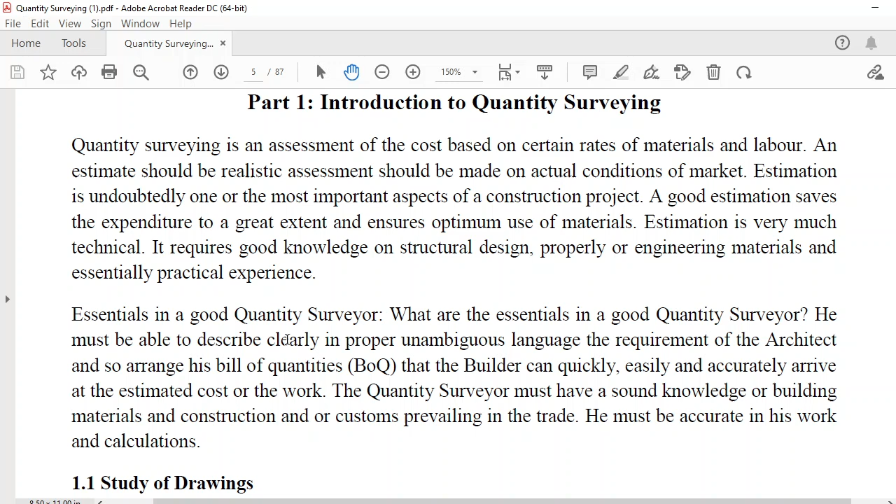Tapos, di ba, I asked you to at least be able to start working on your structural drawing. So bali today, we will discuss about the next book, which is Quantity Surveying. Pa rin ang title, pero medyo may iba siyang scope. So we have already considered na, or you are aware na what is a quantity surveyor.

So, he must be able to describe clearly in proper unambiguous language the requirement of the architect and or civil engineer, and so arrange his bill of materials or bill of quantities that the builder can quickly and easily and accurately arrive at the estimated cost of the project.

Okay, so bali sinimulan nyo na yesterday. I hope you did that, to study the drawings kasi yun yung i-estimate nyo later. So when working on your drawings, you have to look on the drawings and attempt to visualize the work entailed. So study them and are in agreement with one another.

You check on the drawings, the elevations, which are actually given na ngayon dun sa attached drawing kahapon pa. Okay? So actually, we will end up with a bill of quantity of the materials.

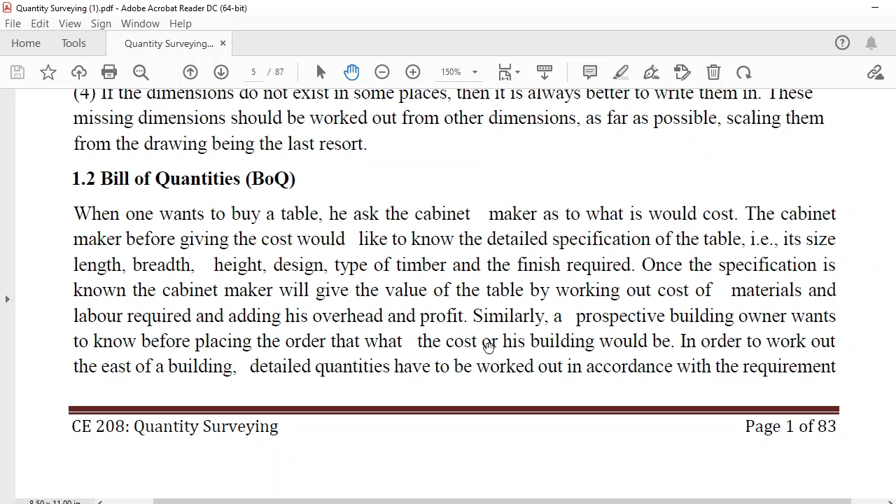Its size, its length, diba? The breadth, the height, the timber, and the finish required. Painted ba or may varnish? Now, once the specification is known, the cabinet maker will give the value of the table by working out the cost of materials and labor required.

Now, in addition to that, syempre, imposibleng wala siyang profit at saka meron din siyang overhead. Overhead may probably be for the equipment he uses, fuel kung kailangan niya, electrical consumption, water consumption if needed to finish the work. Now, similarly, the prospective building owner wants to know before placing the order that what the cost of his building would be.

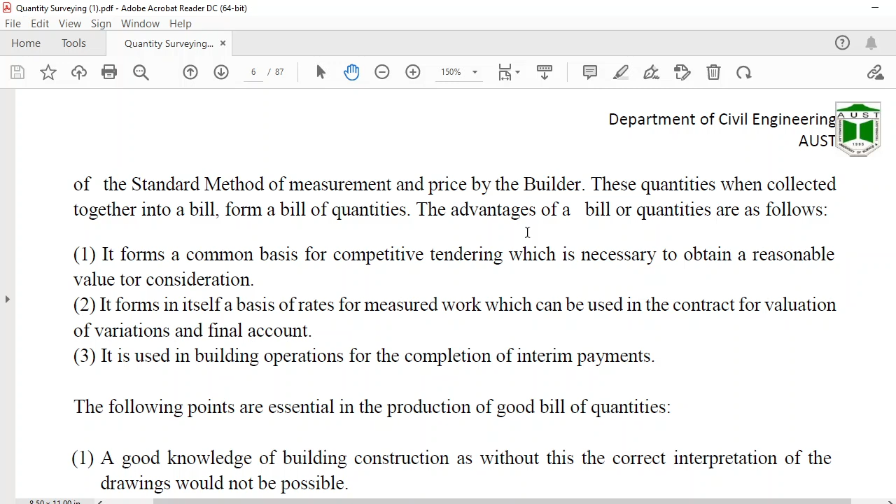So ganun yung concern natin. So in order to work out the cost of the building, a detailed quantity should be prepared for the client. Now, the standard method of measurement and price of the builder should be given. The quantities will be collected together into a bill. So after you have determined kasi yung mga quantities, syempre, ang kasunod na nun, yung mga pricing.

Now, for our subject, we will be focused on the quantities and how will you determine the bali measurement of your structural members and the materials to be used. Now, the bill of quantity, advantage of that is it forms a common basis for competitive tendering.

When we say tendering, ito yung naririnig natin na bidding. Wherein, syempre, paglalabanan if you will be the contractor for a certain structure. Now, it forms in itself a basis of rates for measured work which can be used in the contract for valuation of variation and final account. Now, it is also used in building operations after the completion of other payments or interim payments.

Now, the following points are essential in the production of a good bill of quantity. So ito, kailangan ganito. Now, a good knowledge of the building construction. So mas madaling ika nga, at least you know how to construct actually the building. Yung method use, di ba? Para maging katapat niya yung mga labor cost niya at saka yung equipment that you will be needing.

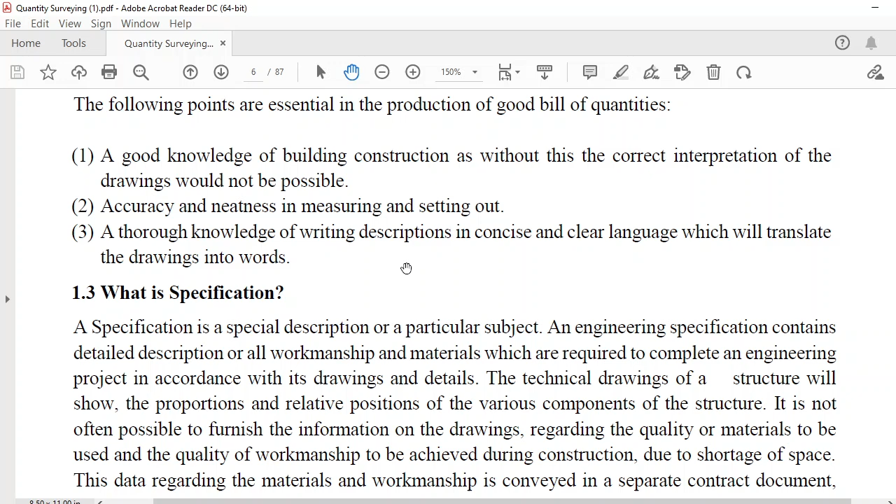Tayo kasi, ang ginagamit natin is the drawing itself. Yun ang ating language. So hindi tayo basta mag-i-English dyan. Pero basta meron tayong drawings, nagkakaintindihan tayo dapat para makagawa tayo ng ending na bill of quantities.

Now, what is a specification? So it is the description of a special description or a particular subject. Now, in engineering specification, it contains the detailed description of all workmanship and materials which are required to complete an engineering project. So nandun lahat, naka-specify yung gagamitin mong concrete.

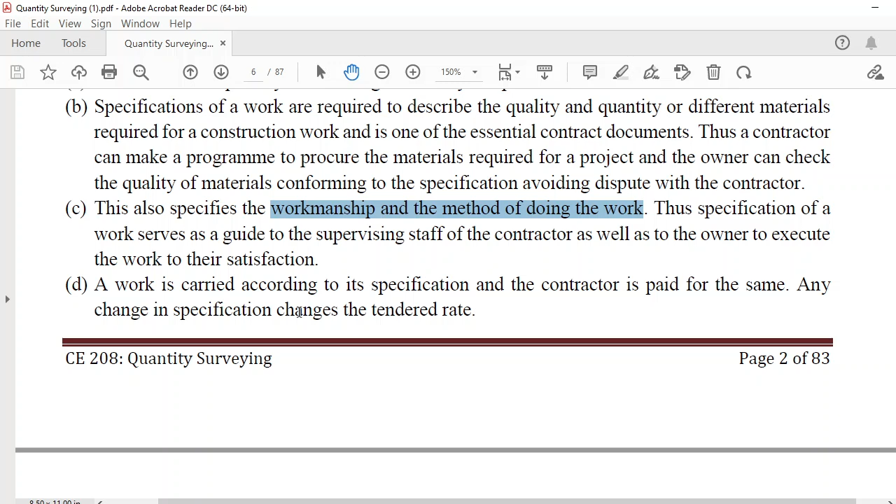Now, the work is carried out according to its specification and the contractor is paid the same. So this will really be discussed - what is the requirement for the work to be done?

As the rate of work is based on specification, a contractor can calculate the rates of various items of work in a tender, in a bid, or in a completed computation with his procurement rates and materials and labor. So that depends too on your labor - it can be higher for you if you have specialization.

Specification is also necessary to specify the equipment, the tools, and plants to be engaged for a work, and thus enables procurement of them beforehand.

The necessity of specification is to verify and check the strength of materials for a work involved in a project. For example, with steel bars, there are different strengths. But which will you use - high strength, medium strength, or ordinary? So definitely, the price will differ.

Now, the main items of works in a building are the following. You have earthworks - excavating the earth so that you can install your footings. Then concrete in foundation - in foundation, this refers to your footing, and it is specified in the plans I shared with you. It consists of lime concrete or lean mix cement concrete with the proportion depending on what is given.

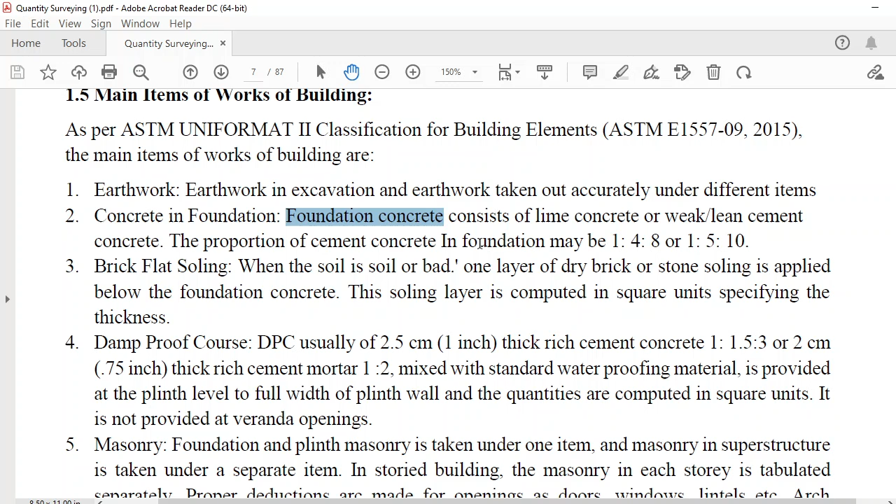We have brick flat soling - when the soil is bad, one layer of dry brick or stone soling is applied below the foundation. Sometimes they install piles, like posts, submerged into the soil to make it stable. Another consideration is injecting cement mixture into the soil so that all its voids or hollow parts are filled with concrete or cement, which increases the strength of the soil.

Then we have the damp-proof course, usually 2.5 cm thick rich cement concrete with the following specifications, depending on the requirement.

Now, masonry - when we say masonry, this refers to hollow blocks. So after the concrete mixture, next comes the concrete hollow blocks, or CHB as we call them.

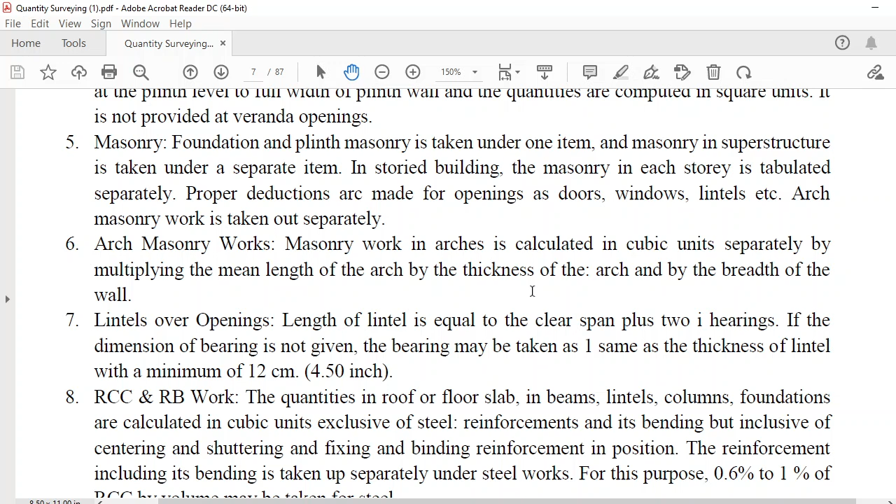So that's why it's very important that you know the structure itself, the shape, the thickness, and the overall dimensions should be specified and should be seen in the plans.

Lintels over openings, length of lintel. When we say lintel, this is the additional structure placed, like a small beam, on top of the windows and doors, so that your wall won't crush when you have an opening for windows.

Okay, then we have the quantities in roof or floor slab. So with that, you need beams, lintels, columns, foundation, etc.

Now, the reinforcement, including the bending of your bars, is taken up separately under steelworks. For this purpose, 0.6% to 1% of RCC by volume may be taken for steel. So if you have a concrete volume, you can deduct 0.6% to 1%.

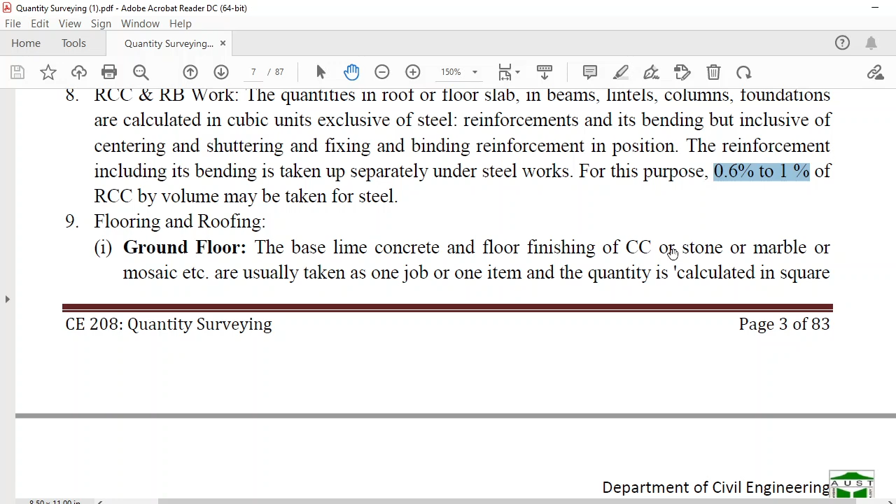And then for flooring and roof, the ground floor consists of base lime concrete, flooring finishing, and CC. It can have stone, marble, mosaic, those are the tiles, etc. Then for your first and second floor, there are supporting structures which are separate, so that will appear in the plans.

Now, our CHB, our walls, usually need plastering so that our CHB or hollow blocks become smooth.

Now, sometimes our small openings take up approximately 0.5 square meter, there will be no deduction made. But if it exceeds that, there may be deduction made for one face only, and the other face is allowed for jamb, soffits, and sills, which are not taken into account separately. For openings which are above 3 square meters, deduction is made on both faces of the opening.

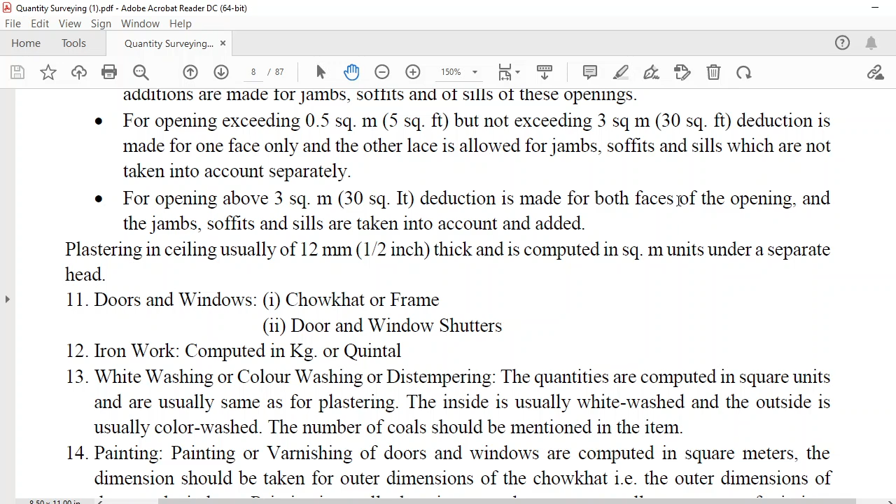As we go along with actual construction, and as you practice, you'll discover the needs for that. So for doors and windows, we actually have the frame, the door and window shutters, and then ironworks, which are usually computed in kilograms.

Quintal is not used much anymore. Kilogram is used when buying, but sometimes we do it by counting method, counting how many pieces you order with a certain diameter.

Whitewashing or color washing and distempering, the quantities are computed in square units and are usually the same as for plastering. The inside is usually whitewash and the outside is color wash. The number of coats should be mentioned in the item.

Now, for painting - to make your structure nice, you may place painting or varnishing, specifically for doors and windows, which are usually computed in square meters. And to be sure that your painting looks good, it is done in 2 to 3 coats aside from the preparation, so you don't simply apply the paint immediately.

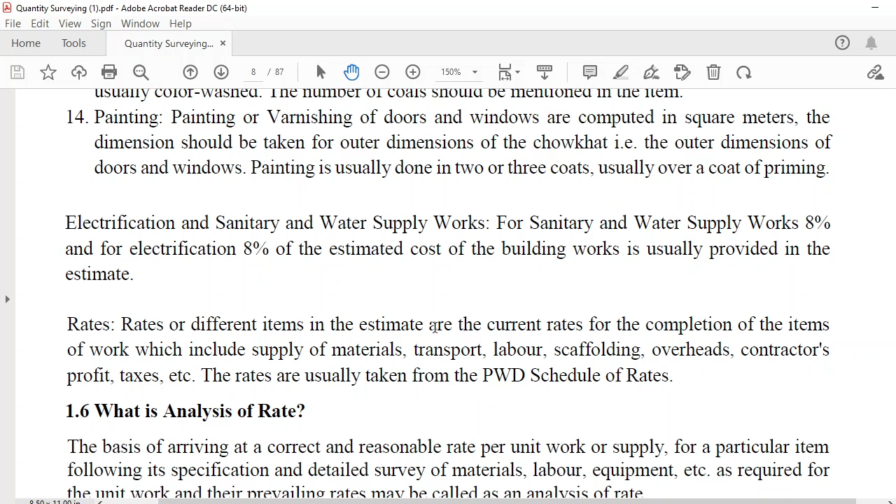So there are particular items that will not be estimated in this subject, like for example painting - we will focus on the others. Painting will be covered in your next subject, construction methods and management, next trimester.

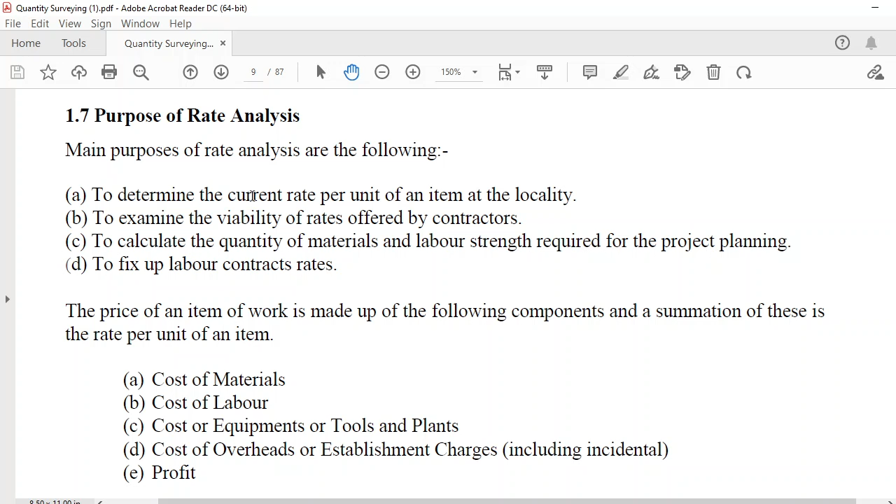Now, what is the purpose of your rate analysis? So we probably know that when you're in the city, the rate of labor is higher compared to rural areas.

Now, the price of an item of work is made up of the following: the materials, the labor, the equipment you will need, together with the tools and plants. Cost of plants - not the plants that are not plants, the area where you will work.

Or we could say the area you will rent so that you will install or house your materials. For example, those who build roads need a plant, they need an area. Instead of starting from their warehouse, they will look for an area wherein they will place the volume of gravel, sand, and cement. That's also where they will mix the concrete.

Parang ganon. So that's near the area to be constructed.

Now, cost of overheads or establishment charges, including incidental charges. As mentioned, when you have electrical, rental, water consumption, security guard, etc. And of course, you wouldn't construct without profit. That's important, of course.

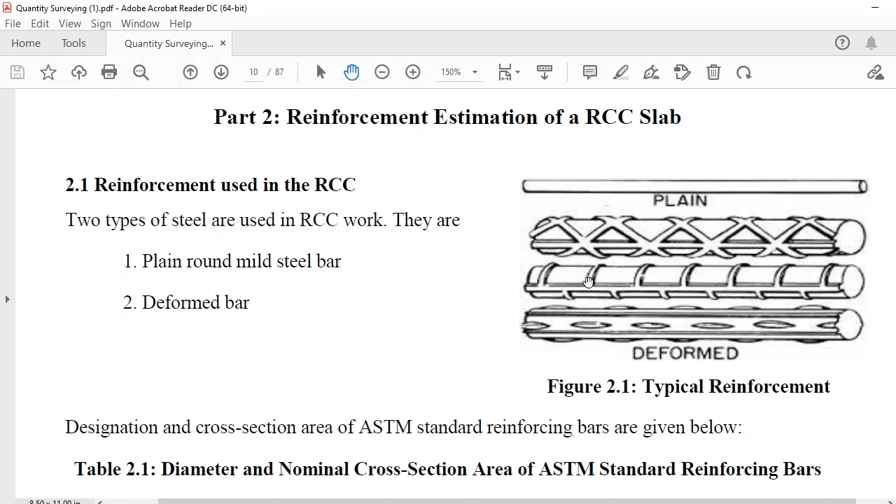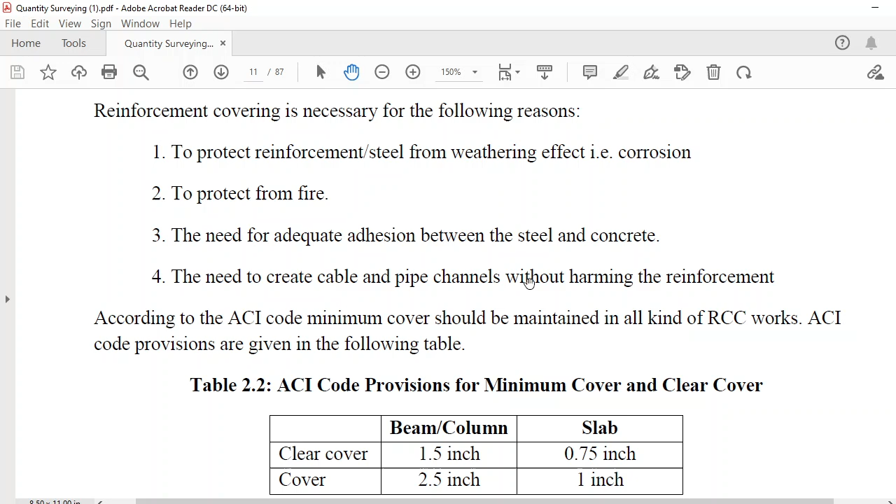Now, these are the required coverings: 1.5 inch, approximately 30 or 40 mm. Then 2.5 is approximately 60 mm. So it's not exactly precise, but when you convert it, this is 40, this is 60.

Now, what about hooks? Usually you also consider that you'll have bends or hooks. So when you bend your steel bar, you'll end up with a hook here. Sometimes it's shaped like this, like that.

And you are required the following dimensions: 12 times the diameter of the bar - that's the extra allowance.

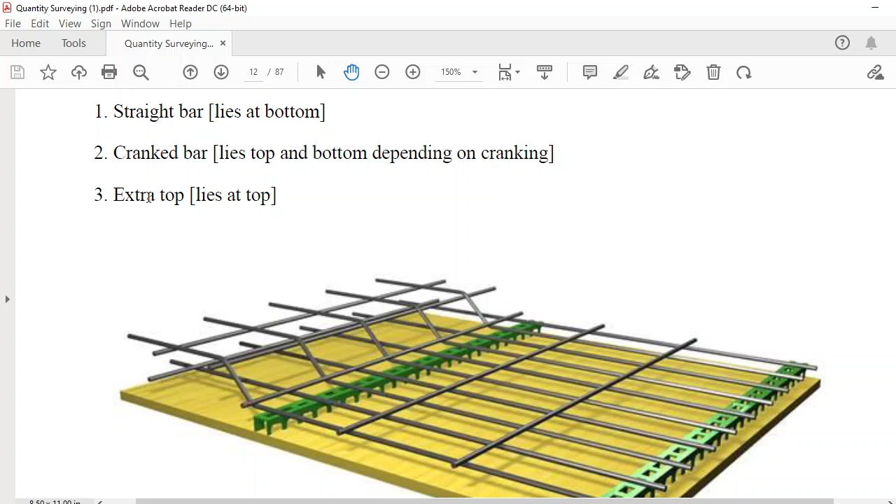Then, this is an example of your steel bar - we have straight, crank which is raised up, then extra top bars. As you can see, you have the straight bars - some straight, some cranked. It depends on the design.

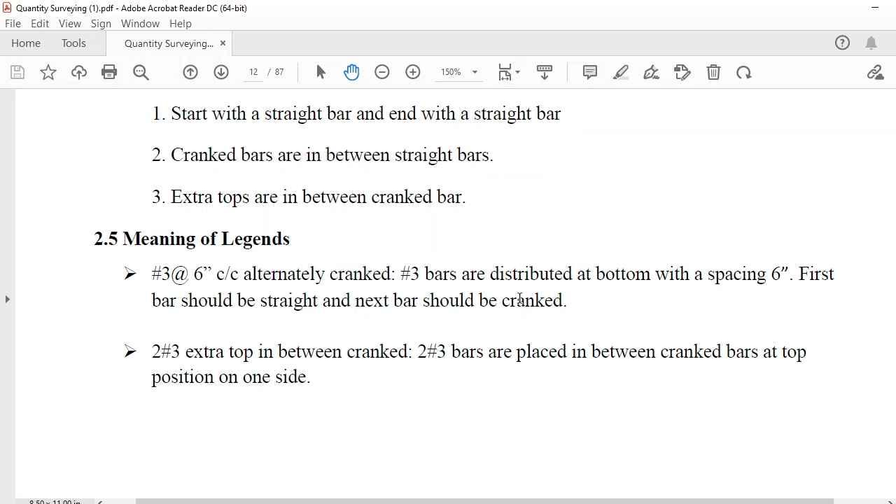What's the purpose of this one bar? If there's splicing involved, the splices - our connections - need to be substantial. This may also serve as additional strength for your concrete slab.

So this is a typical top view of your drawing showing that some are cranked, then these are extra top bars with additional bars, and then you have your straight bars. It depends on the design - it's not always like that. So that's an example of crank.

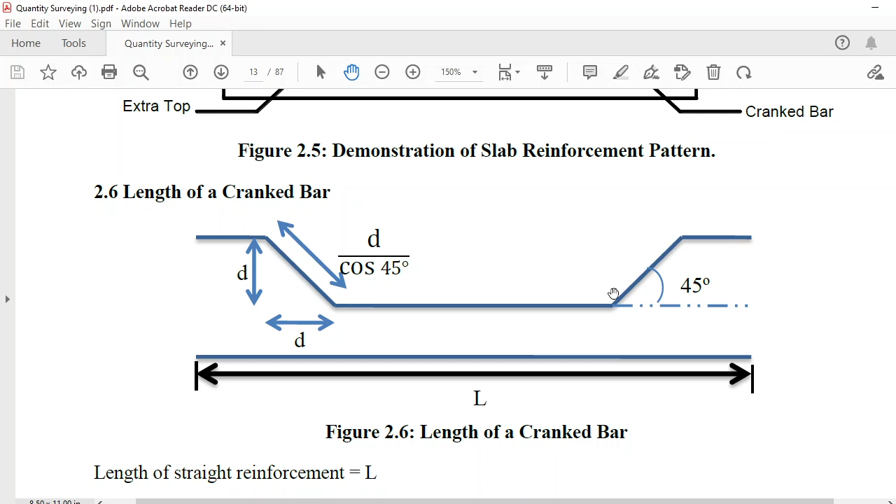Now usually we consider this - considering the total length, the distance from the top here is L over 5. Down at the bottom is L over 4. And it should be cranked upward 45 degrees. So by computation, that can be computed using trigonometry.

So, you should take note of that. This lecture can actually be used as a guide when ordering your bakal in the future.

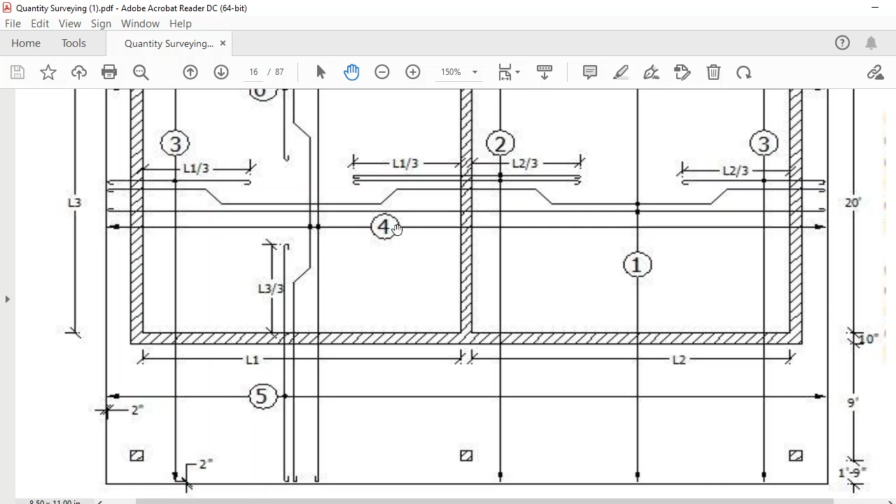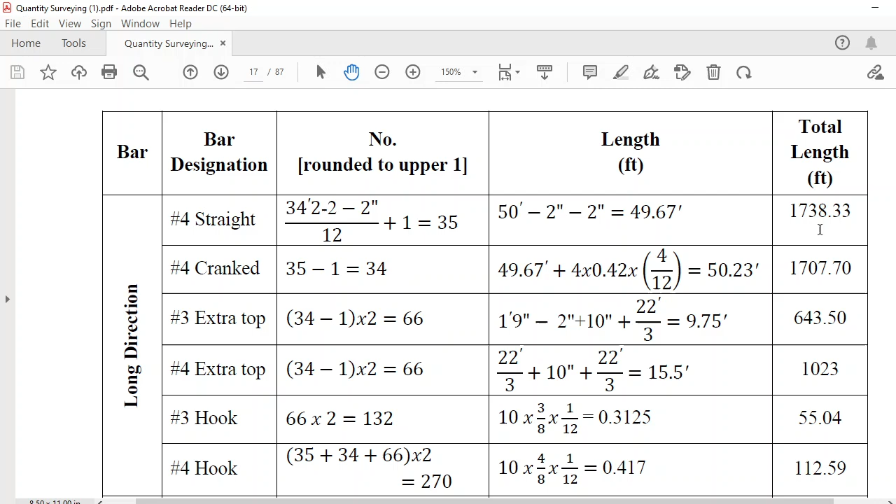Okay, so actually when you do the computation, you need to have it tabulated para mas maliwanag yung gagawin mo, at saka mas systematic, wala kang makakalimutan. So you can do your computation using this - not strictly like this, but this will guide you. You are given the designation, the number needed, the length of each bar to be installed, and then you are given the total length, so that your computation stays organized and you won't miss anything.

So, along the long direction, and then along the short direction. The good thing is if you are given your plans, your drawings, all you have to do is measure it using AutoCAD, di ba? So actually no computation needed - if it's angled, if it's cranked, going 45 degrees, all you have to do is measure using AutoCAD.

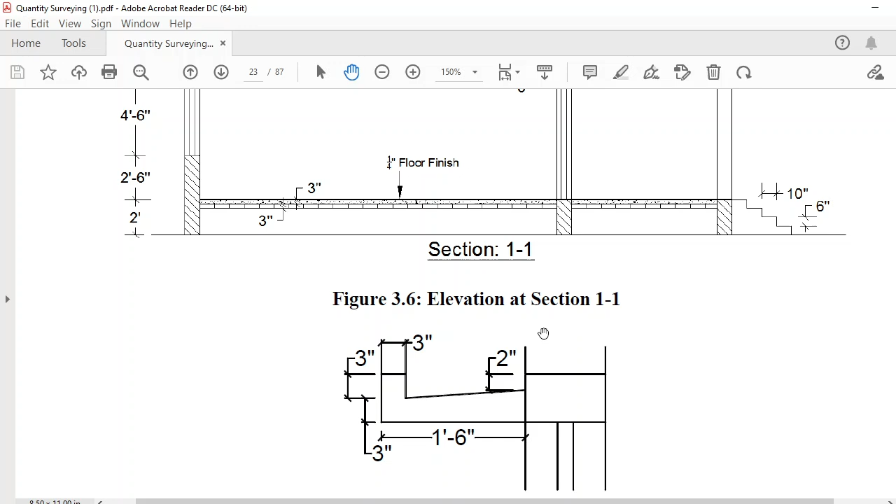Okay, so this is an example of a sunshade - basically, protruding concrete. So what's important is that you know how to read the plans. What are these numbers for? So you know how much concrete to place here.

Okay, so still drawings. So our focus is that you need to know the volume - how to determine length, width, times height, di ba?

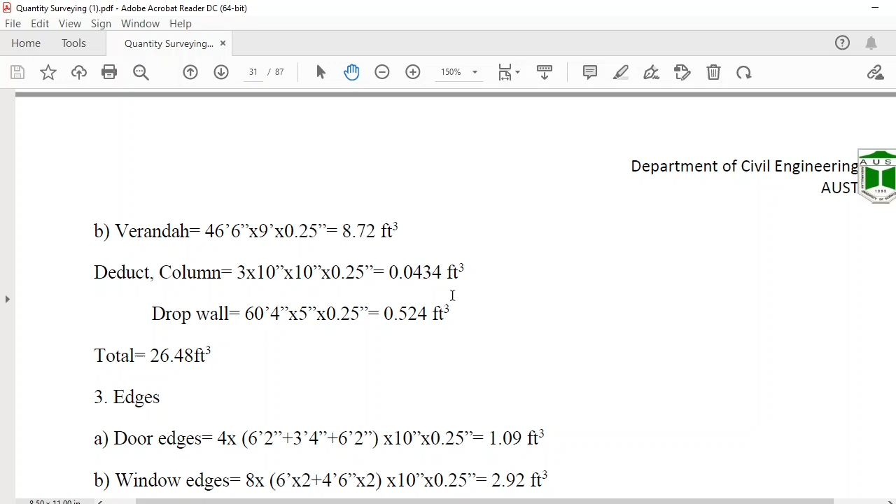Madaan tayo. Meron ding ceiling. Alam nyo naman, kailangan may ceiling to prevent heat from entering the room because of the roofing. Roofing kasi, syempre, kung it is made of galvanized iron, that's very hot. So, to cover up or to prevent yung too much heat that will enter the room, you have to place your ceiling, install your ceiling.

I'll teach you that kung paano. So, we also have the plastering. Okay. Yan, puro computation na. Okay, then, as you can see, dito naman, naka-item.

So, pwedeng ganyan lang yung minsan, what will be the total quantity? And then, if we are already given the cost of it per quantity, so you will end up with the total cost. Okay?

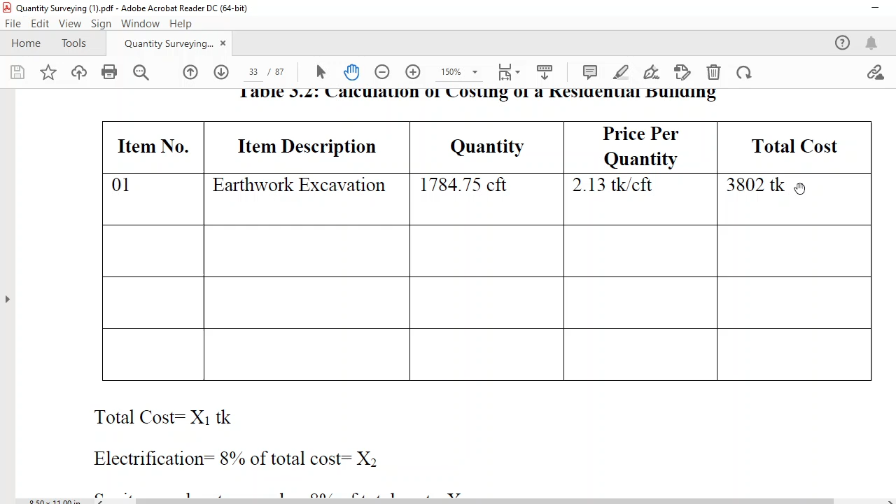Now, sometimes daw, you need the following. 8% of the total cost may be for electrical works. Kumbaga, this is as, ano ba to? A computation to simplify yung electrification, yung paglagay ng electrical lines mo.

Sanitary and water is approximately 8% rin of the total price. So, for example, may price ka na 1M. Yung 1M mo, get 8%, that will be 80,000. Okay? Then, another 80,000 for your sanitary. So, the total cost will be 1 million plus 80,000 plus 80,000. That will be your estimated cost.

Now, take into consideration, bakit word estimated? Estimated kasi it doesn't happen na yung huling pako na ikakabit mo is the exact material na ginamit mo sa site or sa construction. Wala pa yatang incident na na-estimate mo pati number of pieces ng pako. Diba? So, kaya we say estimated, you may probably start with a computation which is lower than the actual construction cost. Kasi baka meron kang na-miss out. There is a possibility naman sa masyado ka nervyoso, naglalagay ka ng additional cost just to make sure na kung meron kang overhead which were not seen previously, meron kang allowance for the total cost para hindi magalaw yung profit mo. Okay?

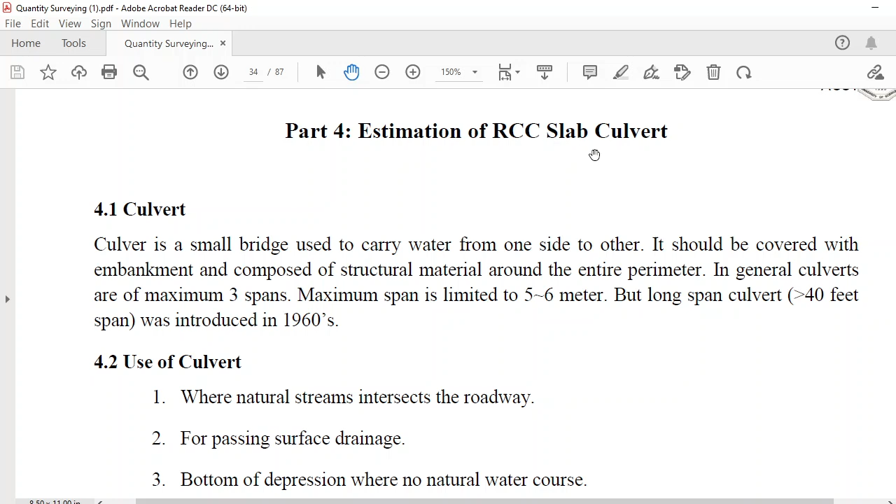Paano ini-estimate yan? So, may estimate yan pag alam mo yung volume nito at sinabing that will be made of concrete, the volume and then multiply it by the corresponding factor. Ito may ending siya na ang finishing niya will be bricks or kung ano mang bato yung nilagay niya. It may be yung boulders or it may be yung kung tawagin nga natin iskombro. Parang ano ba ito? Adobe. Okay, have you heard of that?

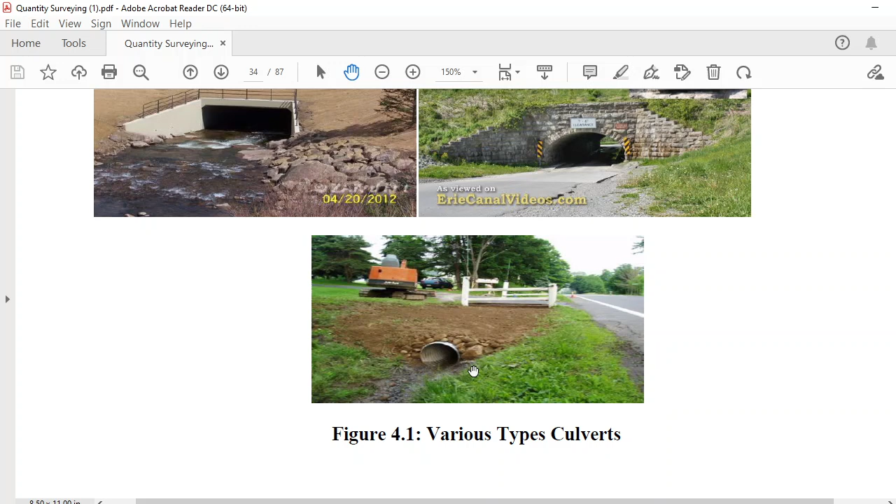There are culverts that are made of RCP pipe, reinforced concrete pipe, tosang kung tawagin. So, kailangan mo lang hukayin yan, install it, and then place your filling materials on top, and then make sure that it is properly compacted.

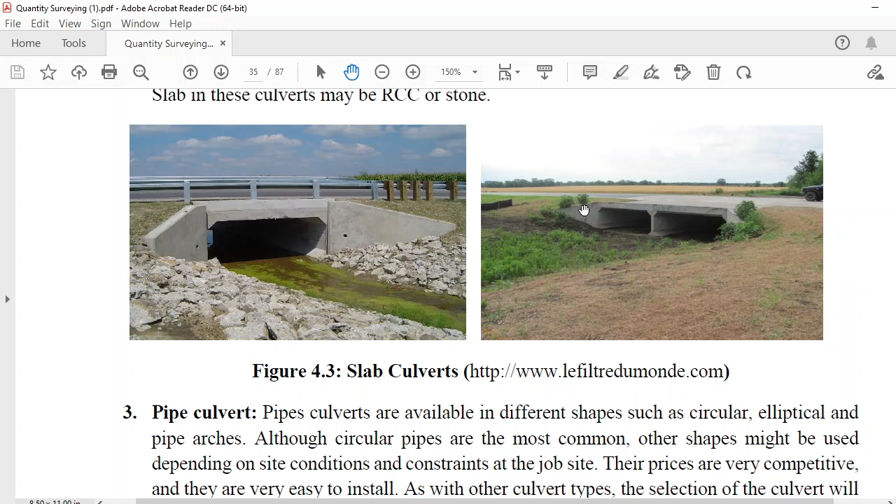Okay, ayan pa yung ibang example. At ayan pa. Diba? Kagaya niya, no? O-order ka ng mga materials to be used for supporting the erosion of your soil. So, kasali yan sa construction materials mo. Hindi lang yung nakakita ka. Na-estimate mo yung concrete. How about yung paligid niya? If it is indicated in the plan that you are to support your soil here to prevent erosion, lalagyan mo pa ng mga ganyan. Or we may have a simple culvert here na meron siyang concrete rito which will be part of your road na. Diba? So, parang small bridges.

So, pipe culverts, ayan, pipe culvert. So, meron siyang reinforced concrete pipe. Box culvert. Okay? Box culvert. Dito sa ibabaw yung pinaka-road. Ayan, kagaya nito, ito yung pinaka-road.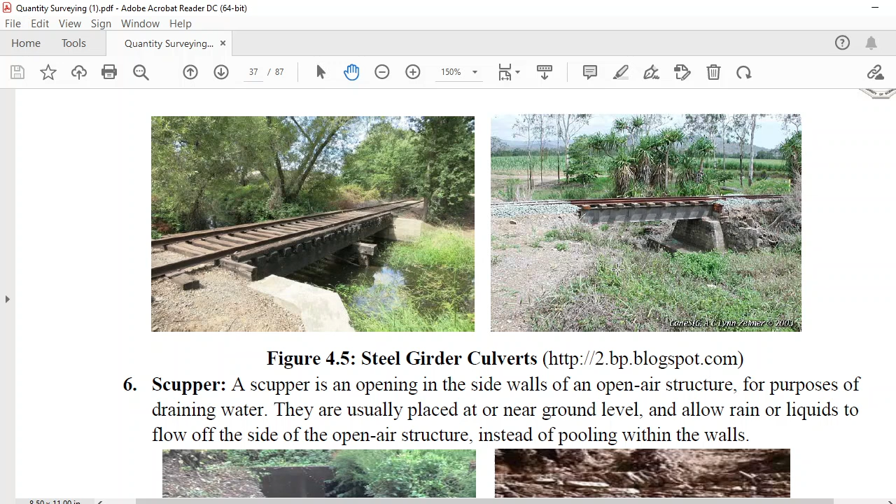Lahat na yata ng itatayo sa ibabaw ng lupa, parang nakadikit sa civil engineering rin o sa construction, sa build. So, ito, train rails. Pero how do you do that? Kung titignan mo, meron pa siyang beam at the bottom of the railings itself, and then plus, it will be supported by concrete again para yung tubig can pass through the bottom ng supposed to be railway. Ito may finishing pa, so that will be considered pag sa actual construction.

Meron naman kayong copy nito kasi that is attached dito sa lecture. Kung titingnan mo, nagsimula siya sa wing, ito yung pinaka-wing niya, yung sinasabi ko ring abutment. So that's the wing. This is your box culvert. Sa top view, ganyan na itsura niya.

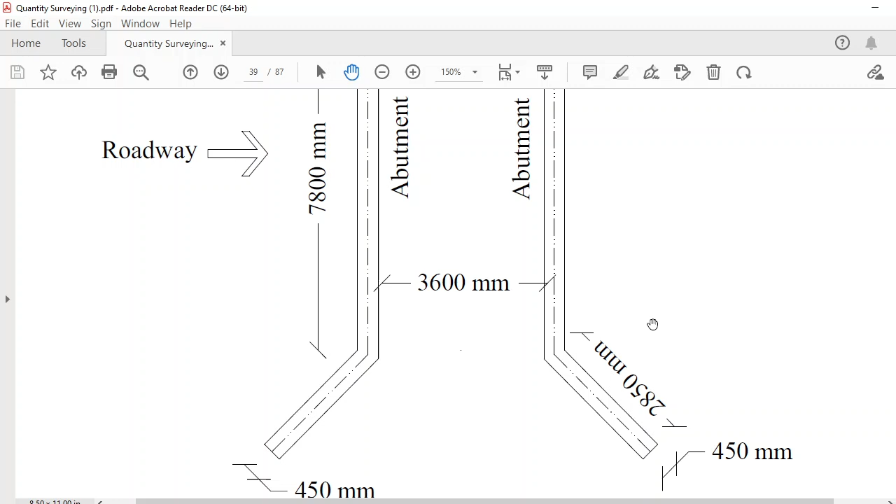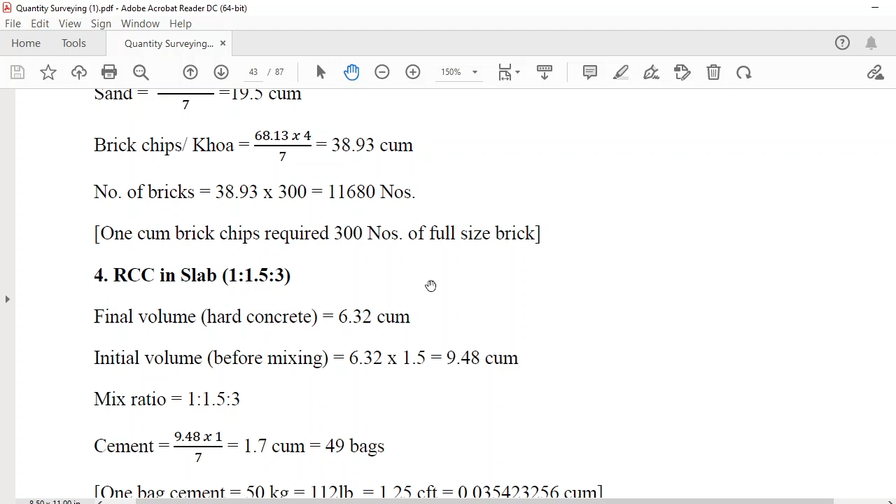So example ng drawings pa yan. And then pag nagko-compute, pwede kang gumawa ng table like this one. So this is an example of computing your structure. And then at the end, you are to determine, you are to summarize the quantities of the materials. Nag-end up siya ng ganyang materials.

Then we have your reinforcement. Simple lang yan kung tutuusin. Look at your plans, measure directly from AutoCAD. So length naman ang kailangan dito, puro length. At syempre, you have to consider rin yung bend kasi baka nakakadagdag yun sa needed na reinforcement mo. So yun yung example niya on how it was computed.

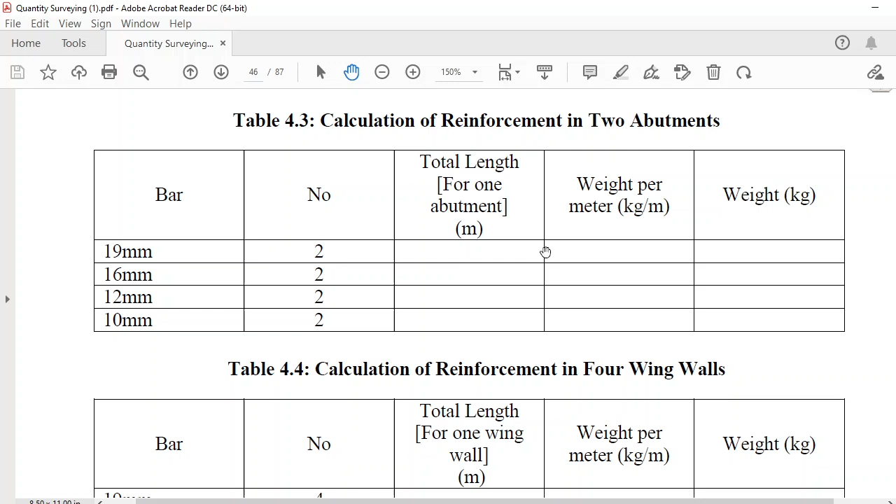Pwede ka may calculation wherein you are to place here the 19 mm. Sa example dito, nilagay niya yung mga bars, the number of pieces needed, the total bars na needed niya for one abutment. So one muna, hindi para ma-itemize kung ano na kailangan mong materials na ilabas kasi you are now working on the abutment. If you are already working on the slab itself, ilang materials na naman ang kailangan. So calculation reinforcement of 4 wing walls, etc.

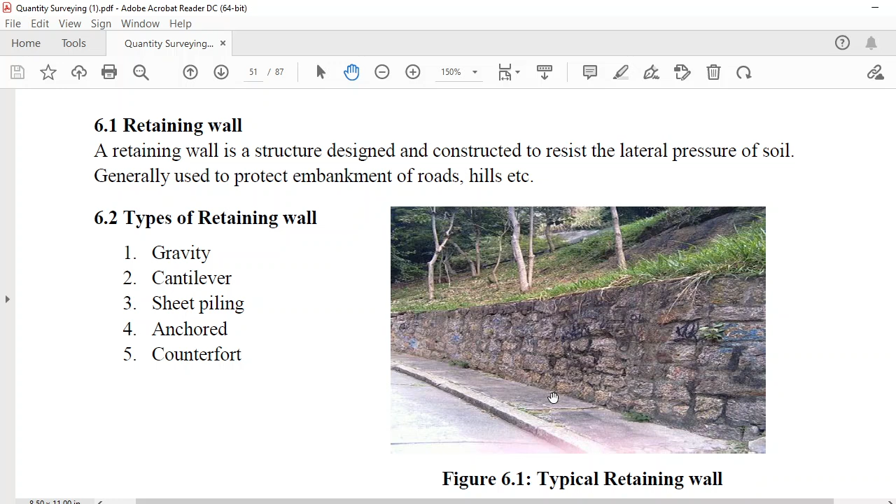Then a summary of your calculation. Then complete the quantity of materials, materials pa rin. Now ito, we have the retaining wall. Hindi na masyadong kailangang i-explain part by part, obviously you can see there. Saan madalas meron yan? Sa Baguio, tsaka sa mga slope na area, Tagaytay. Okay, so ito yung mga tawag sa kanya.

You may also design a retaining wall like this one. Example pa ng retaining wall. Paano ini-estimate yan? Kunin mo lang yung area nito and then determine gaano kahaba yung wall na lalagyan ko niyan, kagaya nung nasa ilog or sa dam, diba. Kung titingnan mo, meron siyang mga structure na ganyan. Typical naman yung pinaka cross-section niya, yung length na lang ang isang concern.

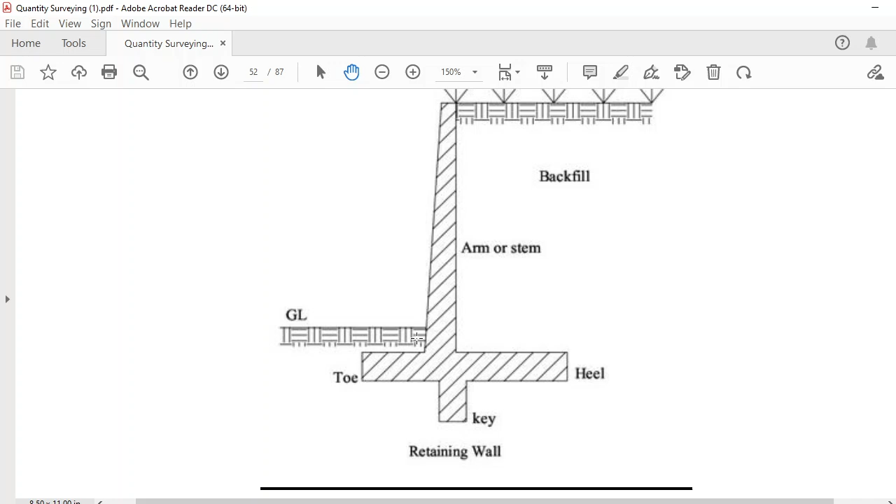Ayan, kung ganyan naman ang design niya, area pa rin, and then the total length. Just to give you ano yung kanyang mga parts: you have the backfill. Siyempre pag nailagay mo na yan, maglalagay ng backfill. Tapos ito yung arm niya, may toe siya, may heel siya, may key siya, so that it will not umikot, may control siya rito. Pag nadagdagan mo to ng backfill, ibabalik mo yung soil pagkatapos mo i-construct yan, so madadaganan tong heel, madadaganan din yung toe, para makontrol na yung pag-ikot niya.

Example, probably you can see there, may mga bakal siya. Ano ang gagawin mo? Bilangin mo yung bakal. Pag binilang mo yung bakal na yan, gaano kahaba ngayon yung lalagyan mo ng wall. With that, malalaman mo gaano karaming bakal. Sa ilalim, you have this. So you look into that. Then you go to the septic tank.

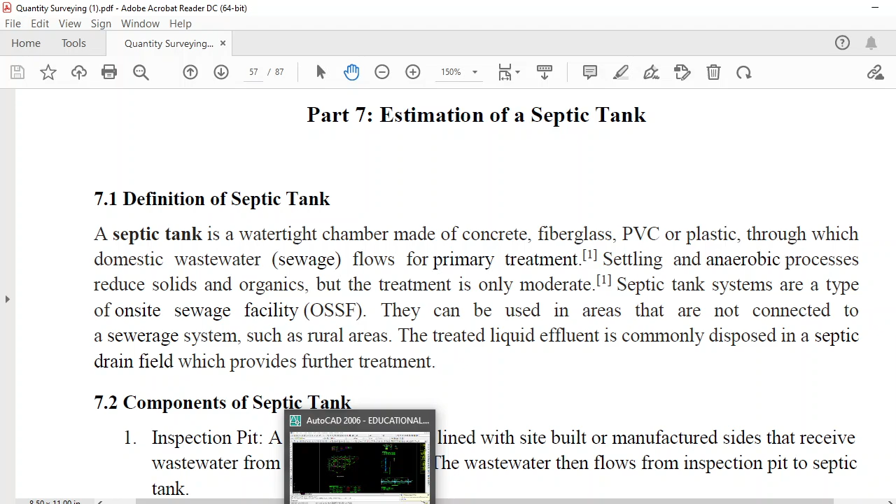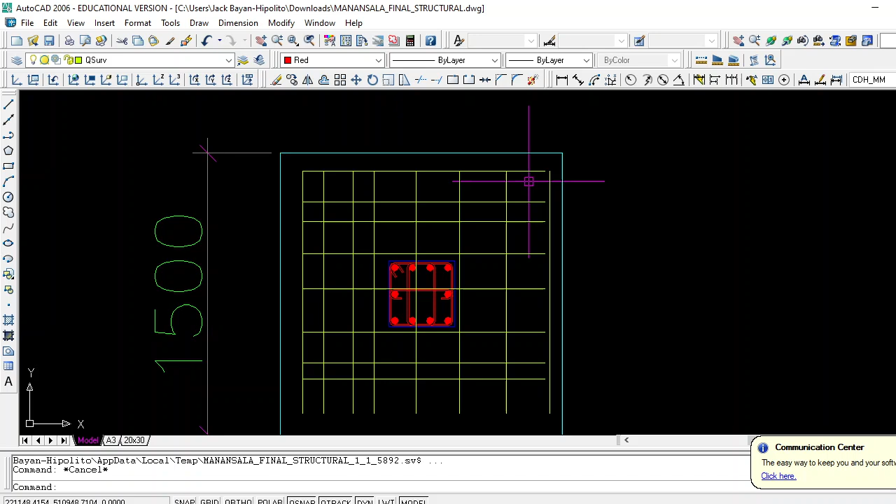your rebar, of course, we have bars along this direction, and how many are given. It says here, go to the table, if that is footing 1, for example, footing 1, you have 9 pieces of 16mm diameter bars. So I demonstrated that the rebar, 9 pieces. So it would look like, when installed, like this.

1, 2, 3, 4, 5, 6, 7, 8, 9. Okay, so they're in a row. Then along the other direction, same thing, all vertical. Okay, so if you copy that, your bars will line up like that.

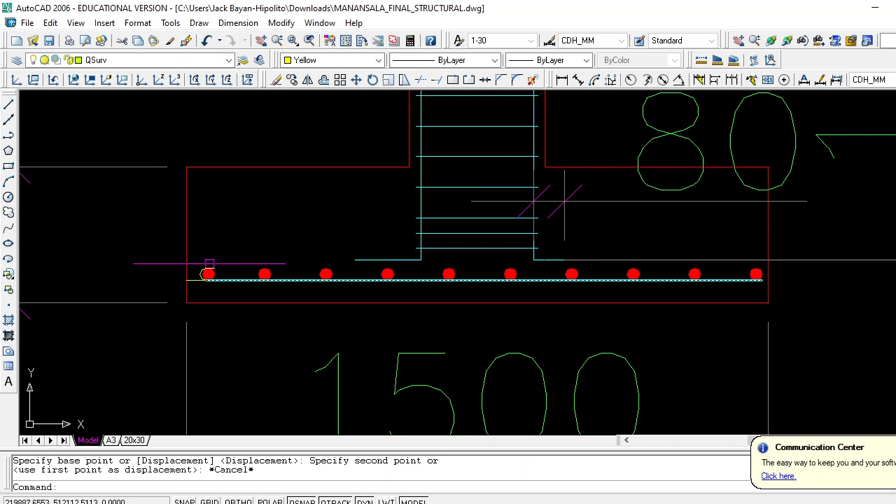Okay, bend. Now, when determining the rebar for the footing, for the bend, instead of, sometimes, if not measured precisely, for yours, you can simply use 1,500. You won't cut it. You're computing it as 1,500. That will be the length of the bar you'll place.

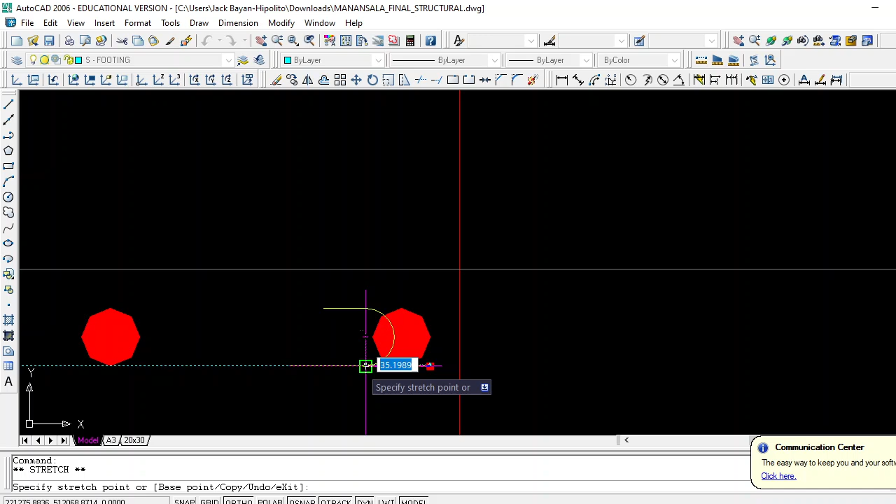Okay, what's the measurement now of your rebar? Start with measuring this one. Measure this. So what's the measurement? The size of my measurement is 23. Is that it? 23 mm.

Okay, and then what is the measurement of the arc? Arc length. Because our dimension is large. The arc length is 49, right? Okay, let me fix the font on this.

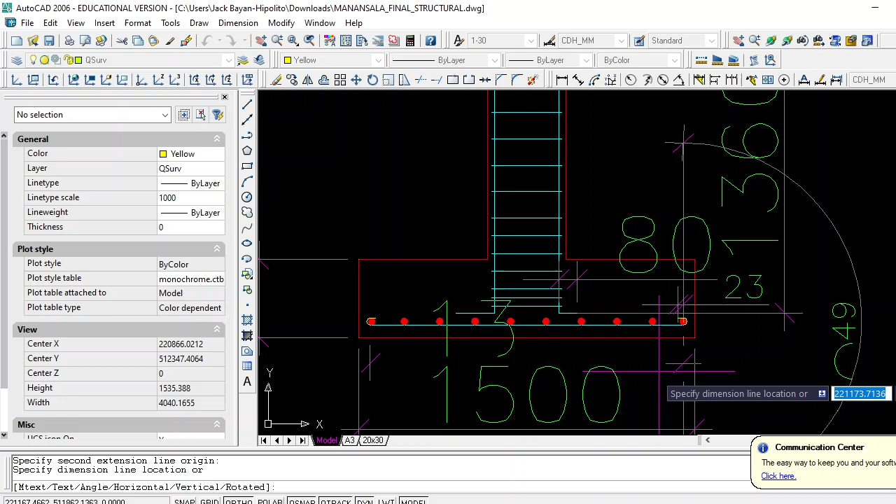Hundred, there. Just this for now. One is 49, one is 23. So that means the other side is also 23 and 49, plus the total length of this one from here to here.

We can see them, they're quite large. Some got cut off. 1.5 and 1398. Okay, so what's the total length of one bar? It is 1398 plus 49 plus 23 plus another 49 plus 23. So let's solve: 23 plus 49 equals that, times 2, plus 1398. Okay, so approximately you have 1542.

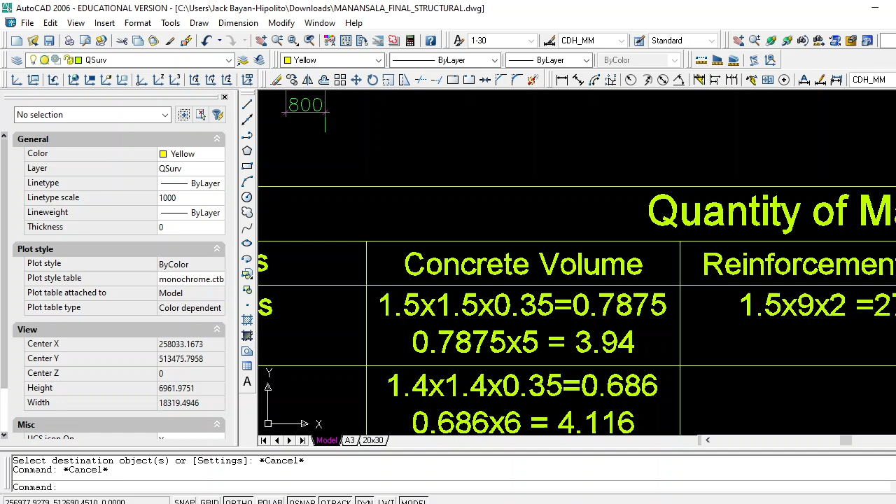For footing 1, we have the concrete volume. Its dimensions are 1.5 by 1.5 times the thickness of 0.35, or that is 0.7875 for one footing. However, there are 5 footings of the same dimensions, so you multiply 0.7875 by 5 to get the total volume for footing 1 alone.

For footing 2, you'll see in the table, footing 2 has the dimensions 1.4 times 1.4 times the thickness of 350. So 1.4 times 1.4 times 0.35 equals 0.686. And how many footing 2 are there? There are 6, so you multiply it by 6, total concrete volume is 4.116.

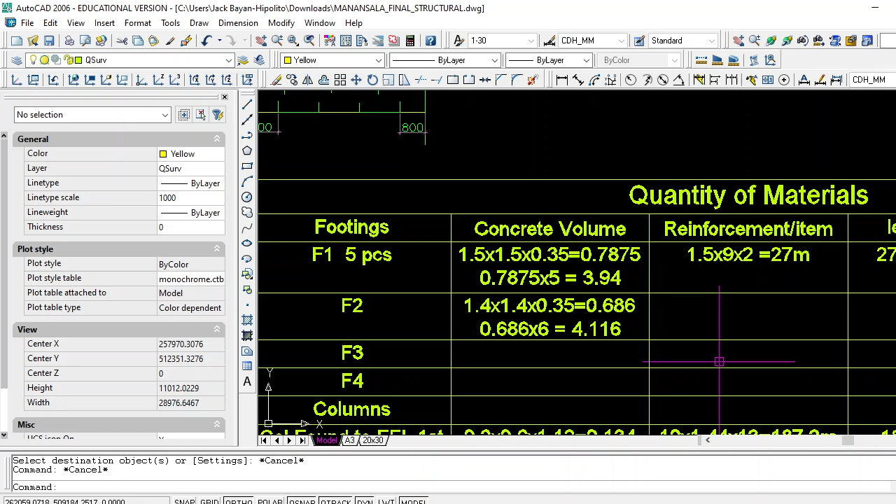Then you have a table to use for that. So you will be using Class A for footings. Now, for reinforcement, we didn't get to do this last time.

You just consider, as I explained, you can consider the total dimension which is 1.5. So there will be 9 pieces, as indicated, 9 pieces both ways. So how do you compute that? 9 pieces with a length of 1.5 both ways, so multiply by 2, you have 27.

Now, how many bars are there, or the total length of the bars? If you have 5 footings, you multiply 27 meters by 5 footings, so you get 135. Okay, so, this is actually wrong. This should be, let's edit this.

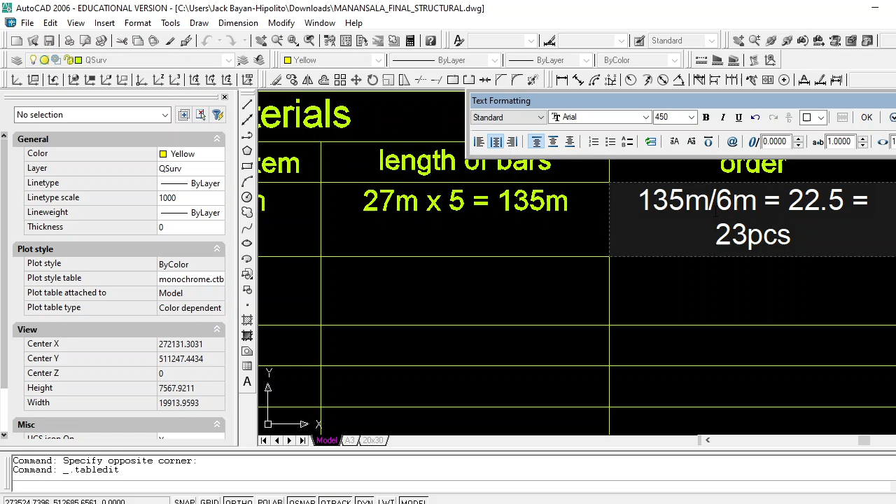Hindi mo edit. Okay, instead of 150, it should be 135. 135 divided by 6, you have 22.5 or 23.

However, meron akong kinonsider dyan eh. What if you are to consider your bar? For example, ito yung bar natin na 6 meter. Tapos ngayon, you are to cut 1.5 each. Kunyari, meron kang 1.5 na cut.

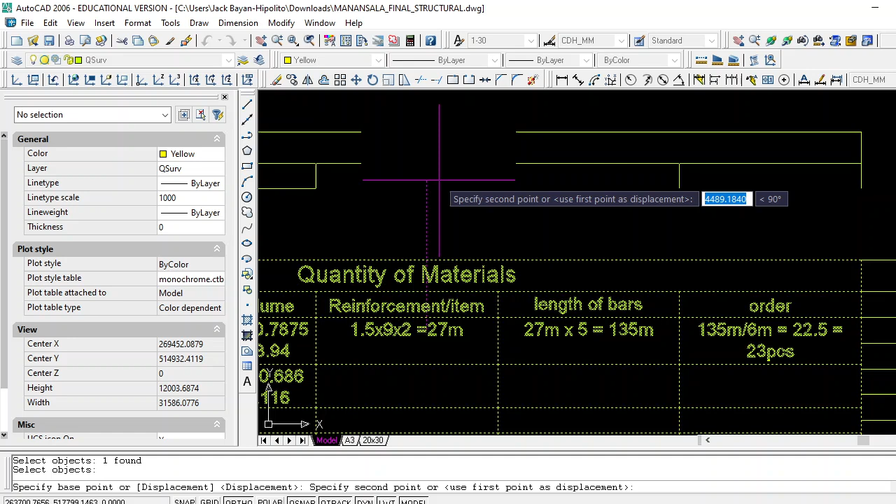Nakopya ko lahat. Kopya ko lahat. Copy. Ayun yung nasasama siya lahat. Okay, dito na lang ako.

Okay, so for example, meron akong ilang bars meron dun sa footing 1. Sa footing 1, I have 9 bars. Multiply by 2 kasi both ways.

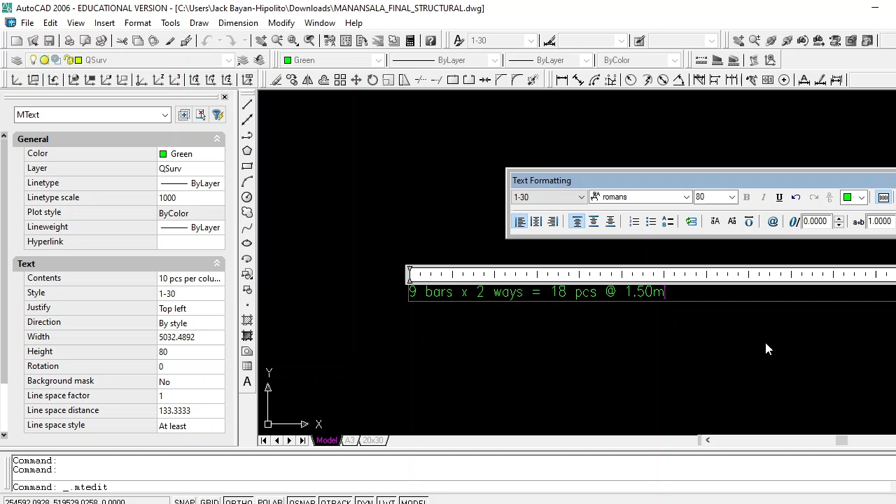So what do I get? 18 pieces, at 1.5 meter each. Diba? Okay.

Now, kung meron akong 5 footings, 18 pieces at 1.5 each meter. Diba?

Tapos with 5 footings, ang magiging value niya will be 18 times 5. So I'll be needing 90 pieces at 1.5 meter each. Diba? Each. Now, yung pinakita ko kanina sa inyo, meron kang 4 na bakal.

Ito, may 4 kang bakal na makukuha mo for a 6-meter length na o-orderin mo isang bakal. Diba? So ibig sabihin, yung 90 pieces, i-divide ko siya ng 4 pieces per 6-meter

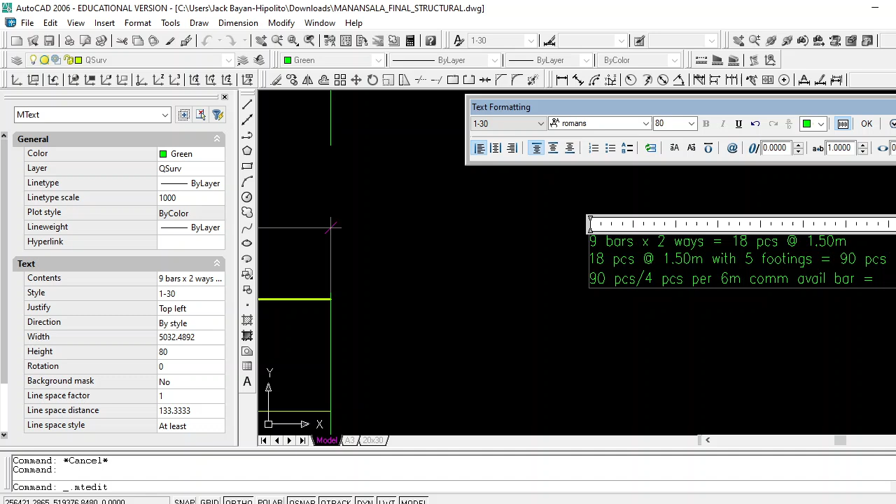commercially available bar. And that will give me 90 divided by 4, 22.5. Siyempre, hindi ka rin 22 pieces of 6 meter bar. So ibig sabihin, 22.5, or gagawin mo na siyang 23 pieces.

Pieces na anong bakal gagamitin mo? 16 millimeter diameter by 6 meter in length. Yan ang pinaka mag-o-order ka. Yan ang order mo. Okay? You got the point?

Okay, now paano kung ang nangyari, ang dimension niya is 144, 1440, di ba? Just like yung, hindi pala ito, 144. Naggawa ko na ibang example.

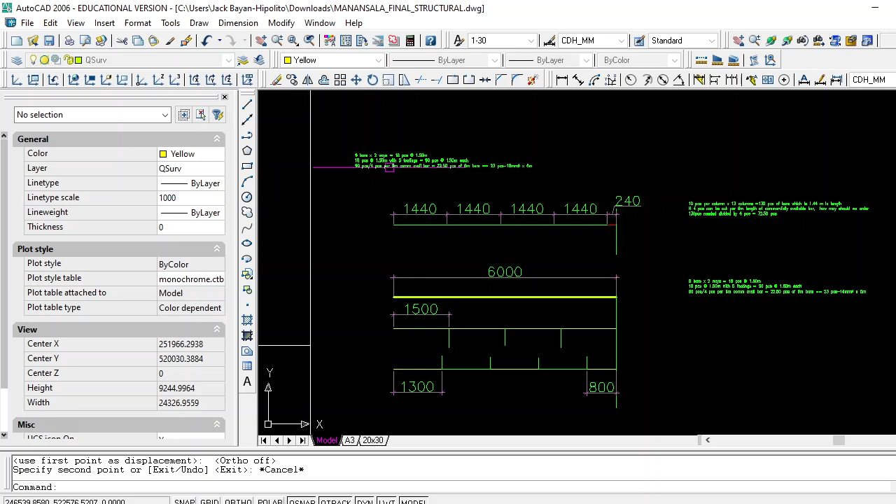Okay, for example, ang gamitin natin is 144. Masosolve ko na yung ano nyo gagawin. Now, what if ang dimension ng bakal na kailangan mo is 144? Diba? Paano kung ang o-orderin mo pa rin? Okay, I'll copy this, copy it here.

Okay, 144. So paano kung ang bakal mo 1.4? Meron ka 9 bars, 2-way siya, 18 pieces din, 1.4 each. So 18 pieces at 1.4, kung 5 footing siya, how many pieces do I need? I still need 90 pieces ng bakal ko with a dimension equal to 1.4. 1.440 pala yung nasa example natin, for 5 footings. Diba?

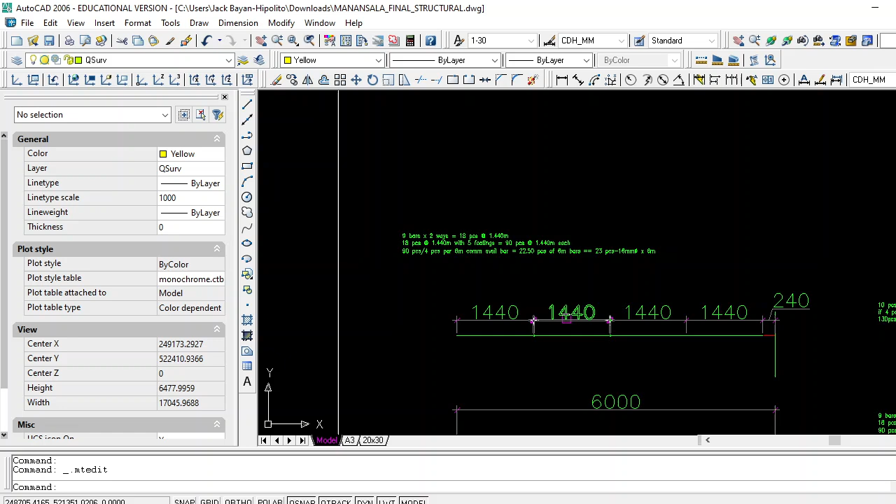So i-analyze mo ngayon yung 6 meter bar mo. Okay? Yung 6 meter bar mo, makakakuha ng 4 na 1440, tapos may sobra siyang 240. Magagamit mo pa ba yung 240? Actually, hindi na. So meaning, you will be ordering rin 90 pieces divided by 4 na 16 millimeter bar, and

you will still be needing 22.5 na 6 meter bar. Pero you take note, lagi kang may sobra na 240 mm per bar. Okay? Kaya minsan, kailangan alam mo kung paano cutting nun. Kasi may isang simpleng pagkukumpit niyan.

Pwedeng ang gawin mo, ganito lang mabilisan. Sasabihin mo, 9 bars, 1440 millimeters multiplied by 9 pieces multiplied by 2 ways, then multiplied by 5 footings. What do you get?

Actually, you will be getting the total length of the bars. So, 1440 times 9 times 2 times 5, I will get... nagkagulo yata ako, sorry, it's 1.4, I forgot, 1.44 times 9 times 2 times 5. The total value that you will get is 129.60 meters. Okay, tapos na.

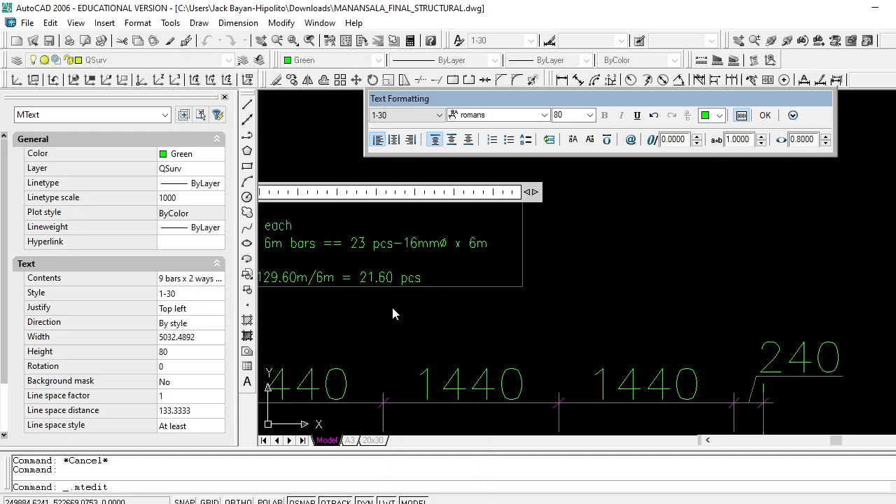Okay, tignan mo yung naging diferensya. Yung 21.6 pieces, hindi kinonsider yung waste na 240 mm. Kaya rekta-rekta lang, na parang lumalabas, pakikinabangan mo pa yung maliit na kaprasong to. Kaya lalabas yung order mo, pag kinat mo na yung bakal mo, yung 21 pieces, sasabihin mo pa, order ako ng 22 pieces na 16 mm diameter, galing mo pa, no? Diameter bars by 6 meter.

Galing mo. Pero sa totoo lang, kulang, kasi pag kinonsider mo kung paano siya kinakat, kakapusin yung 22 pieces mo. You get my point? Yun yung kahalagahan ng alam mo kung ano yung dapat maging cutting ng bakal mo, so that you will be able to consider din yung waste na actually can no longer be used for the footing, yung 240.

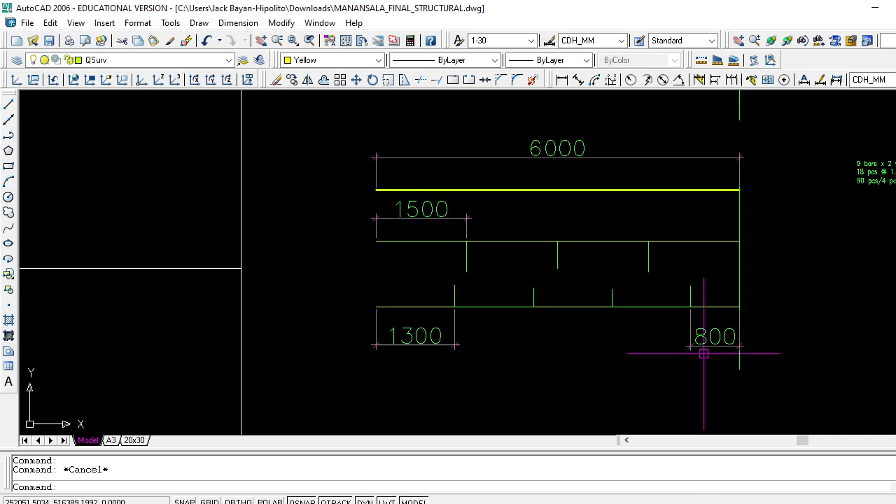Okay, nagets nyo yung point ko? So ito, example din. What if ang cut mo is always 1.3, 1.3. Meron ka ring waste na 800 which cannot be used. Itatabi mo na lang yan for other purposes, pwedeng ilagay mo sa mga lintels mo, additional support for reinforcement, etc. So, yun yung mangyayari sa bakal mo.

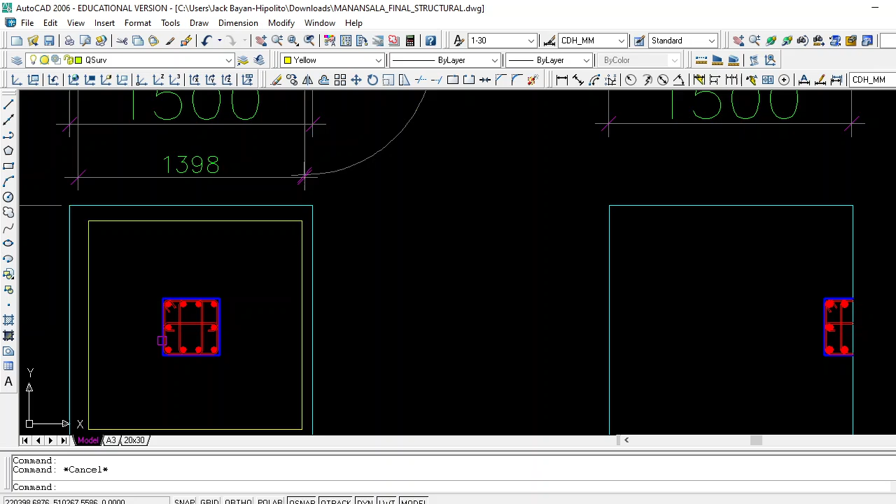Okay, bali, itong table na to, pinakita rin yung sa mga footings. Ay, columns pala, sorry, columns. Ayan, yung column natin. So, yung column natin, meron tayo ditong column and beams. Where by column? Where is the column? B1, B2, cantilever, and then the column. I cannot find the column. Ito pala yung column natin.

Okay, for example, yan yung column natin. Alam ko may detail pa to ng column, hindi ko lang makita, wait lang. Let's see. Ito. Okay, say you are given your column C1, C2. Pag kinonsider mo yung column 1 mo, dimensions niya is 150 by 500 multiplied by the total height na lang. It will have 16 mm bars. So, ganun rin yung mangyayari. If you are given a height of 6 meters, you have 16 mm diameter bars.

Kaya lang, meron tayo ditong drawing wherein it shows you ano ba nangyayari sa bakal natin pag sa footings. Okay, say meron akong height na 1.2 lang yung footing ko, ay column ko, pero look at the dimensions. Yung bakal mo, ganyan. Tapos, there is a bend there. So, what do you do?

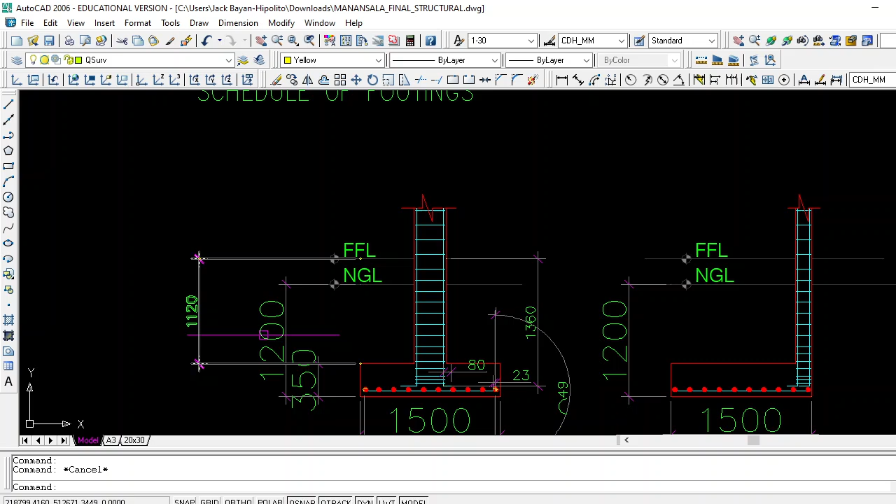Gagawin mo dyan, you measure lang the total length of the bars. So, if I will give you a height of 1.1 lang, you are given here that is for your finish floor line. Kung lalagyan ko to na ang ground floor ko up to the second floor beam will be equal to 3 meters, diba? 3 meters. So, lalabas 3 meters plus 120 plus yung dimensions dito.

You are to determine pa yung dimension from this one to this one, i-add mo pa yon. And then, you still need to add yung pinaka naging bend para kumapit siya, so that is 80. Dito ko nga yung dimension, 80 to 50.

Nakalaki iba. Bakit ka ba nakalaki? Who are you? Dimensions. Teka lang, dimension. Kulit anak natin.

Okay, so pag kinonsider mo to, nakakabaliw ang laki ng dimensions. Okay? So, kung ano yung makita mo sa drawing, kailangan i-verify mo yung mga yun.

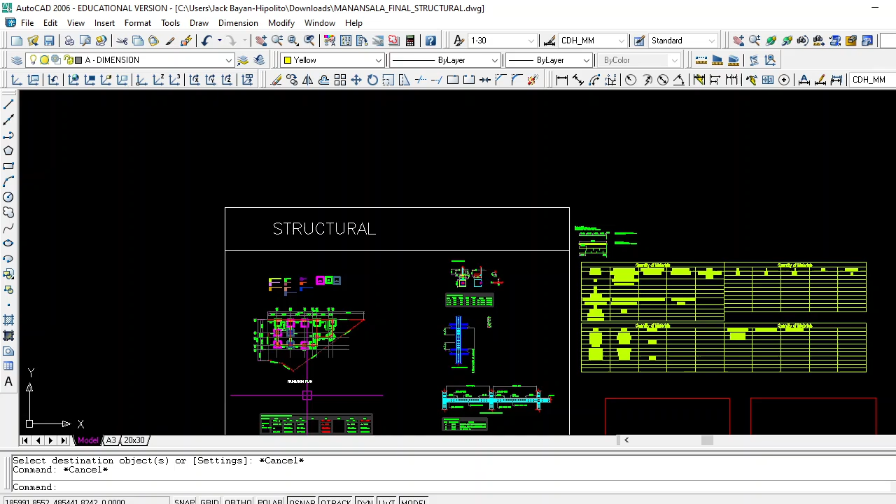Meron tayo dito isang simple na nakalagay dyan that your column here is from penthouse to the RB level, so with a height of 3 meters. Naka-specify na lang second floor hanggang penthouse will be 3.2. Okay? Then we have 3.3 for ground floor to second level, and then foundation to ground level.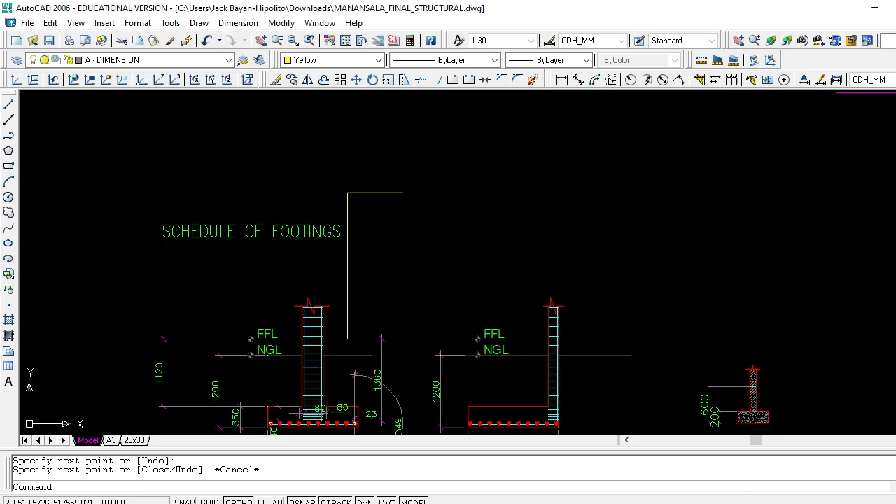San kinukuha yun? Lumalabas, if you have here your ground level, yung column mo will have another height. Yung height niya, mula raw kasi dyan hanggang a certain distance, yung length nito, this will be for your second floor level, diba? After ng second floor level, you have a level hanggang roof beam. And then, you will have another level from roof beam up to penthouse sa taas.

So, imagine, kung given ka ng 3.2 and 3 meters na column from ground to penthouse top, ano total length ng column mo? Ang total length niya will be yung length nito, yung height nito, plus yung width nitong bend niya, plus you don't forget the 120 value, and then plus the height here, plus the height here, plus the height here. Okay? Pero syempre, i-consider mo dyan.

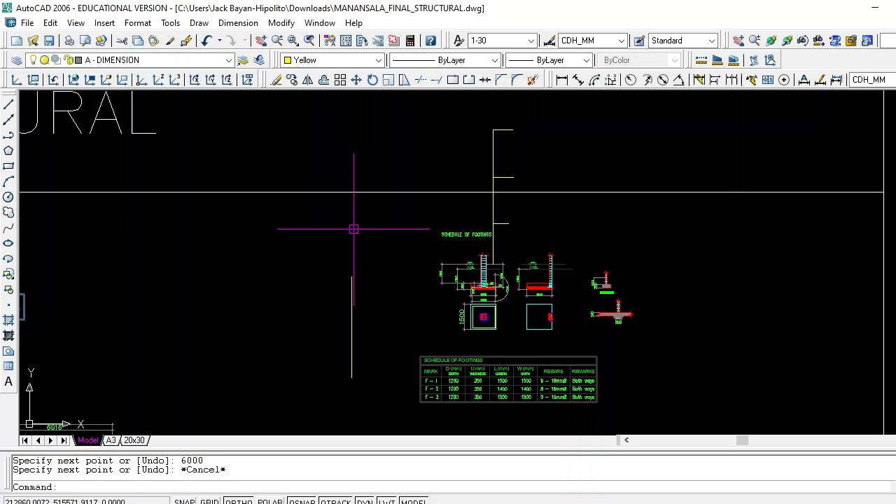Paano yan pag naputol? Say, meron kang bakal na 6 meter ang height niya, ang length ng isang bakal. Will that be enough na ganyan na lang yung bakal mo, tapos idudugtong mo ba siya ng ganito? Say, may bakal ka pang binili na isa pa. Okay? Pwede bang yung next 6 meter ipapatong mo lang na ganyan? I-consider mo na ano ba yan, naka-welding ba? Diba? So, iba yung kapag ito, 6 meter, kailangan mo ng ganyan kahabang bakal.

What do you do with this? Itong part na to, yung part na yan, as much as possible, magkaka-splice ka. So, what does splice means? Splice mean, ang bakal mo magiging pa ganyan.

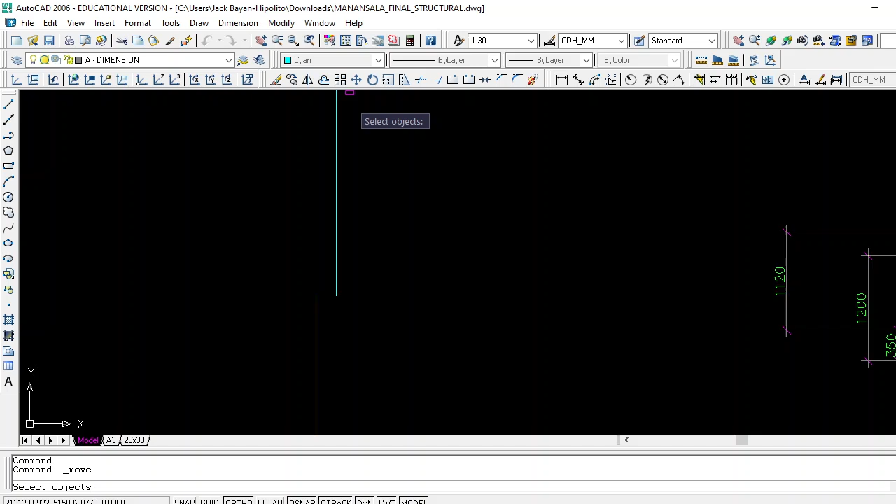Okay, so if I will make a splice equal to 400 mm, that means the effective dimension of one bar will be reduced - 5.6 na lang. Then the dimension of the other will remain as 6. So, because there's a splice, the total effective length for 2 bars spliced straight like that will only be equal to 11.6.

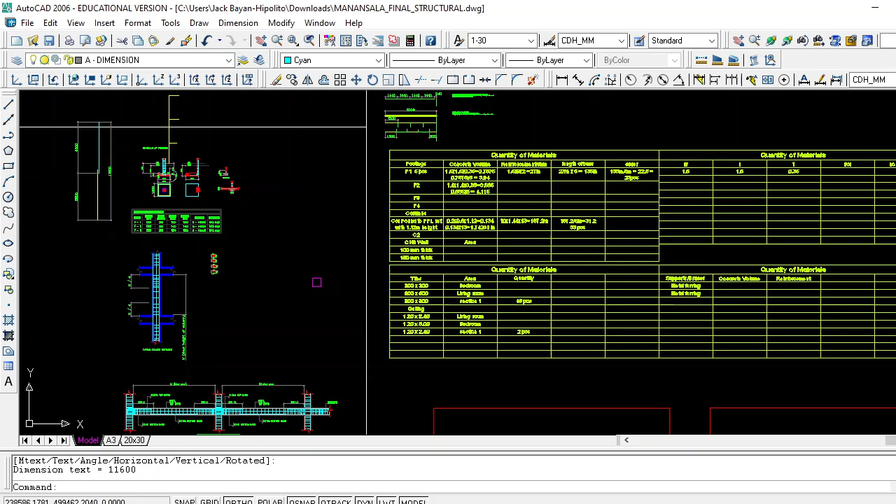So, I want you to work on this. Know the quantity for footing 3, footing 4, then the columns, and then you are to determine the area of the CHB wall. Where is the area of the CHB wall?

I already did this. The area, so that will be your total length of the wall that will be laid with CHB. Let's just imagine our doors and windows as deducted from the rest.

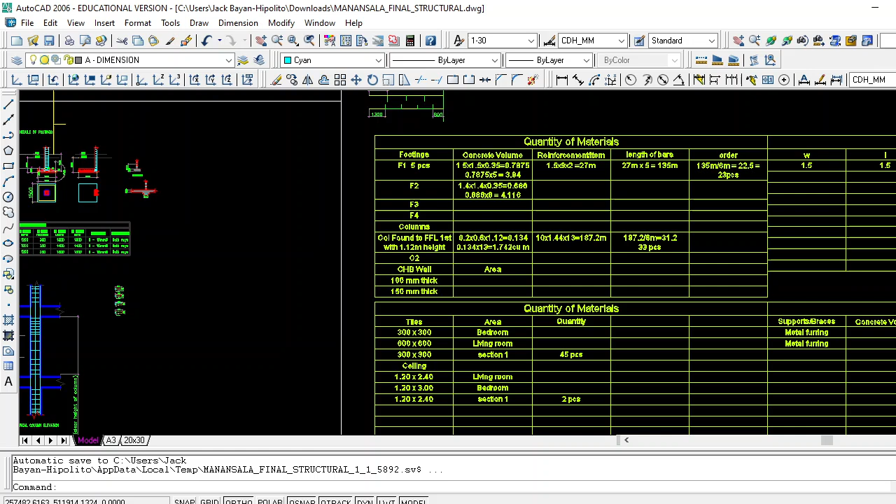So your reinforcement for the column, determining the number of bars. So if the total length, like this column from foundation to finish floor line, 10 bars will be used with a height of 1.44, and there will be 13.

Column 1, which is from the first floor, from foundation to first floor, 13. So, multiply by 187.2 meters and then divide it by 6 meters, 33 pieces are needed.

So, this will be your work to check on column 2. Right? Find column 2. So maybe you should start on it already.

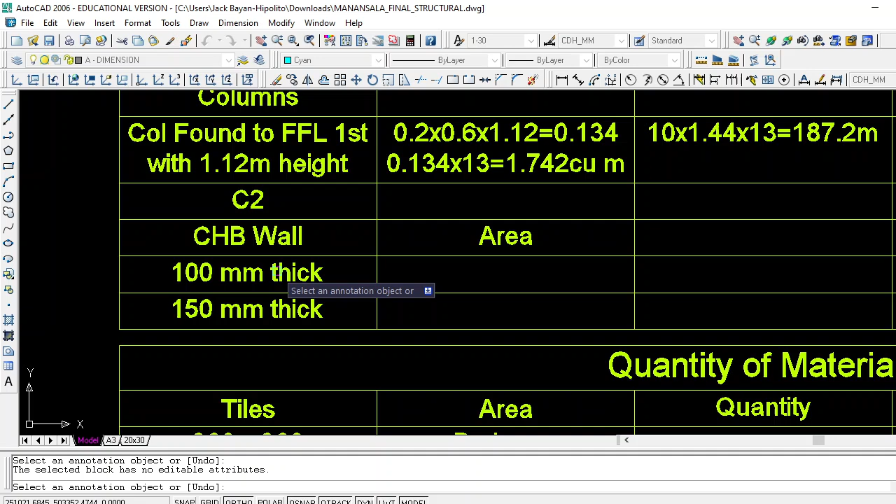And then for your CHB wall - I can't edit this. Okay, so for your CHB wall,

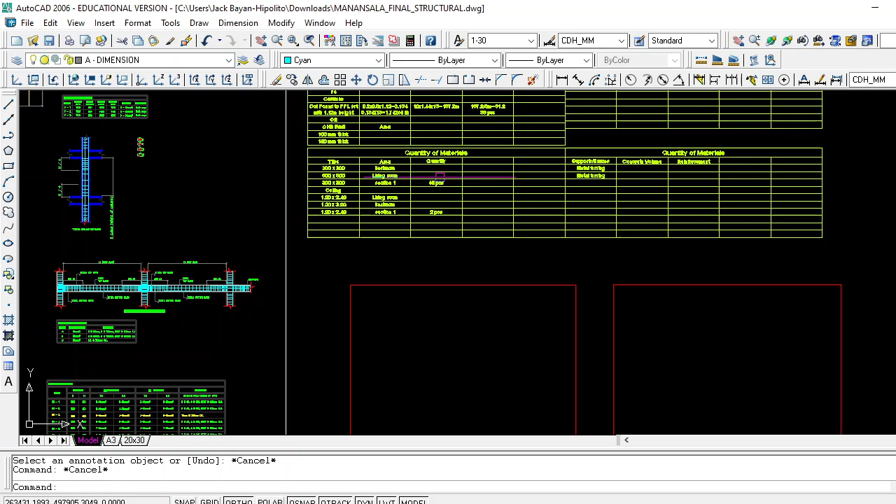Okay? So that means for our penthouse, consider 3 meters as the height. For the second floor up to there, this will be second floor. What you'll use, second floor to penthouse floor level, is 1.2 meters - ay, 3.2 meters. So that means your CHB won't just be a single 100 and 150. Let's consider the penthouse to be 100 millimeter thick. Then, the CHB for your second floor to your penthouse floor will be 150 mm.

Okay? So how do you get the area? Area will just be equal to the total length. Please take note of this. Total length - once you get the total length, next is to multiply by the height of the wall. So, you are given a 3 meter height of wall, am I right? One is 3.2, the other is 3. Okay, the upper one is 3 meters, the lower one is 3.2.

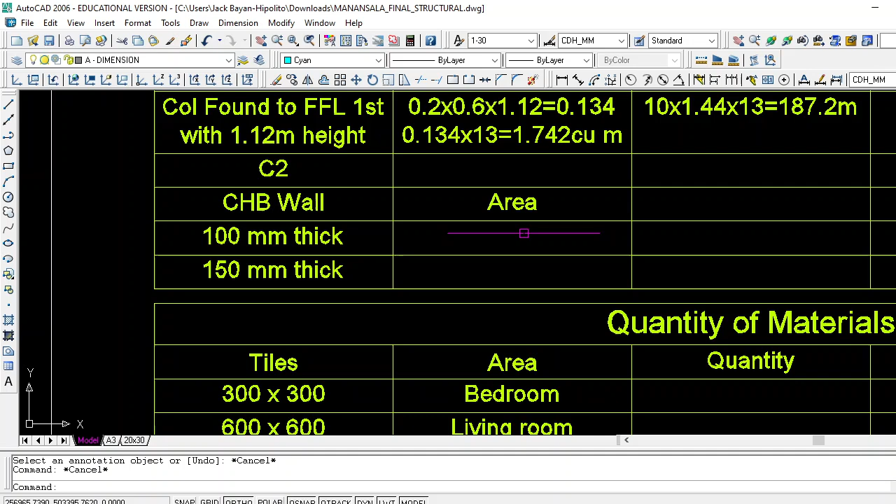Everything will be submitted - you place this table. This is an example, actually not an example - this one serves as your computation. Now, if I use Excel with you, Excel, you can do it like this, right? One column will give you the width, then the length, and then the thickness, and then the volume will be equal to width times length times thickness.

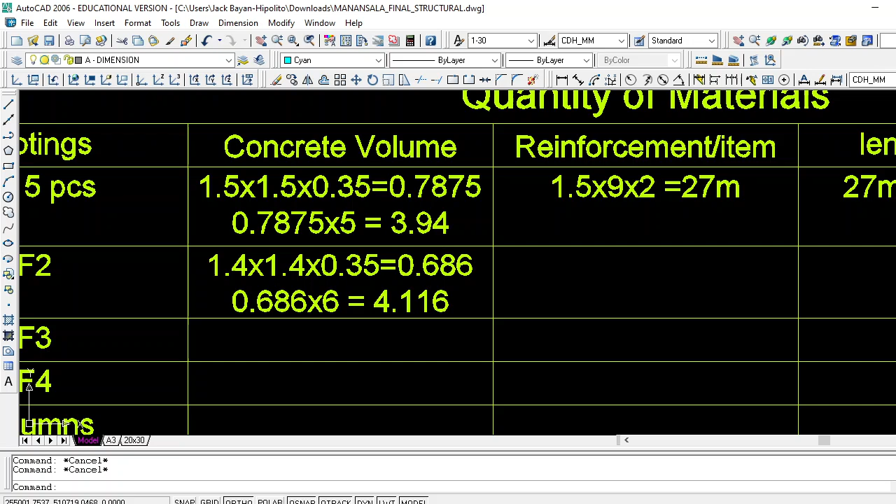Maybe, the rest of the day, you work on your table. This, you work on this table. May I remind you, you will put this in your Excel. Okay?